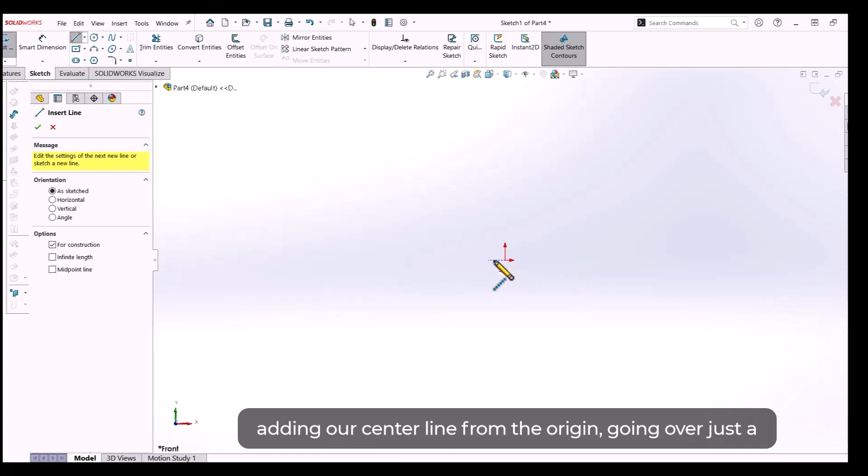Okay, we're going to start with a new part and sketch on the front plane, adding our center line from the origin, going over just a bit, and we are going to anchor that, make a fixed position right there. That's going to be for our revolve feature, which we're going to do after we create the profile of this sketch.

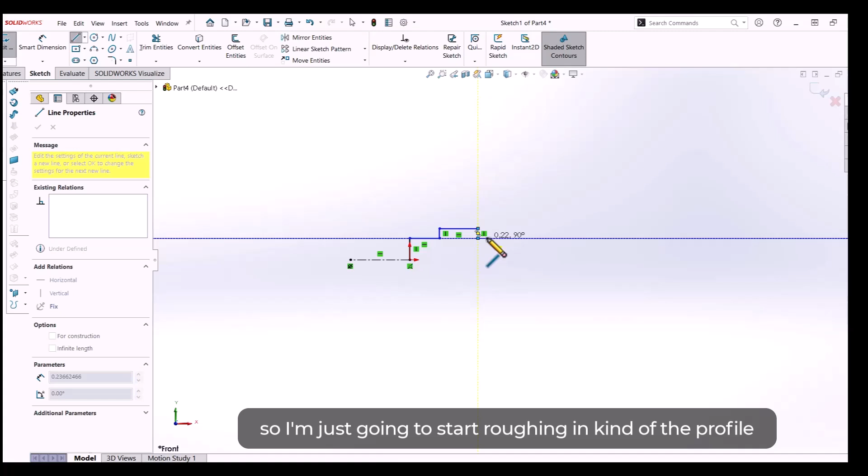So I'm just going to start roughing in kind of the profile that's shown in the book. You can see the preview and the numbers as I move the cursor, and so I'm getting it kind of close. I'm going to make sure that that's enclosed by turning on and off the shaded sketch.

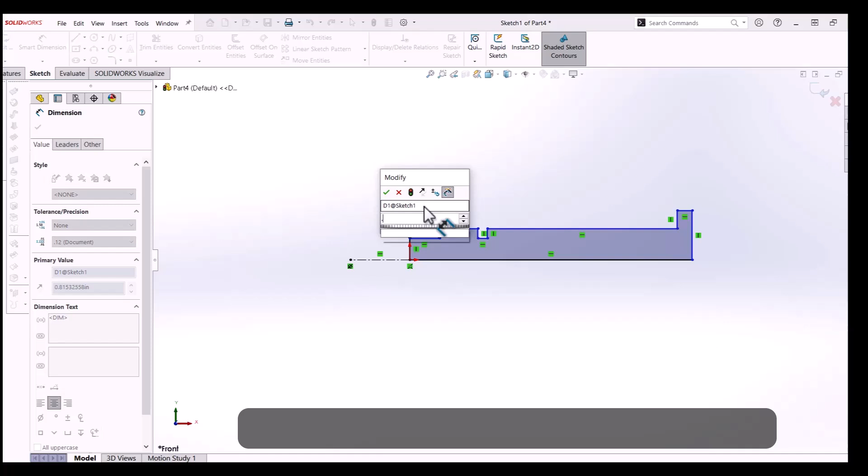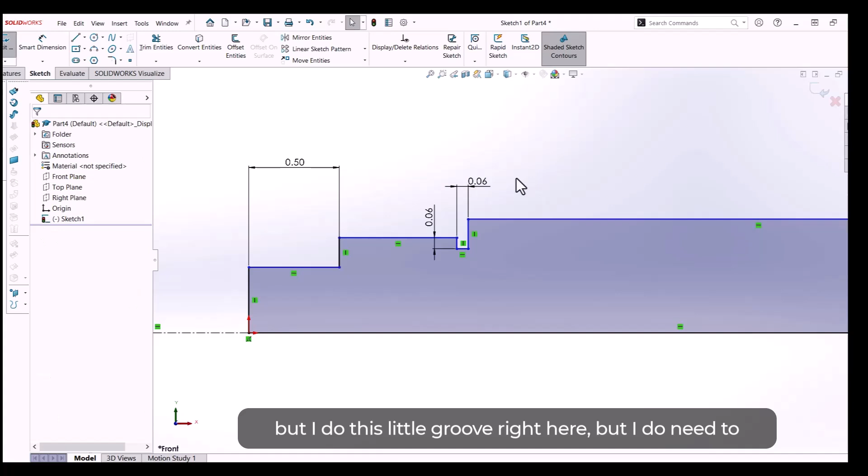Okay, just going to start dimensioning this out, just like in the book. Trying to find the best place to start. I guess on this part, there really isn't the best place to start, but I'm going to do this little groove right here, but I do need to make these two lines here collinear.

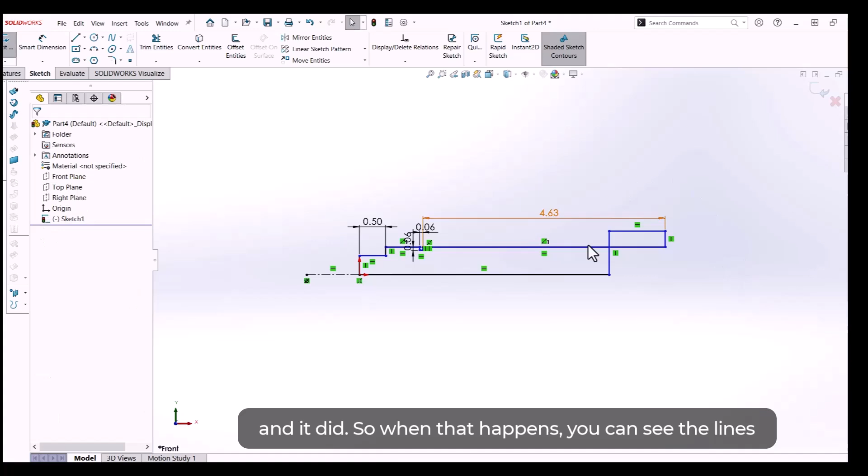Okay, I'm going to start adding some more dimensions, and this might screw up our profile when I type this in. And it did. So when that happens, you can see the lines crossed over, and I'm just going to drag that final little part off to the side to make that possible shape again.

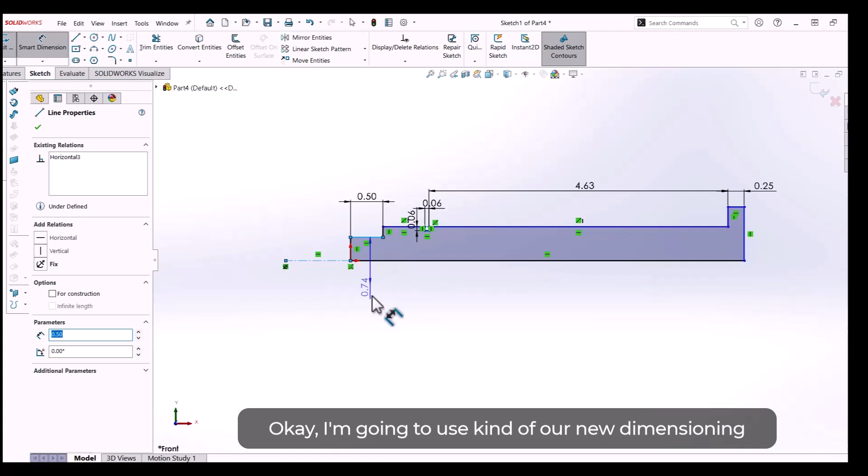Okay, I'm going to use kind of our new dimensioning technique to draw across the diameter of the entire future part after the revolve. You can see that to do that, I'm clicking on the center line first, then tapping the line, and then crossing back over the center line to give it that overall dimension.

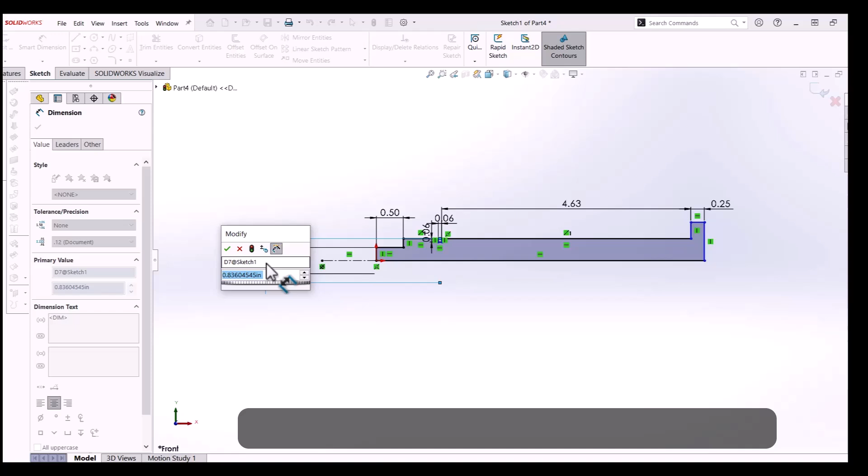I'm going to do it one more time on this right here. Crossing over, you can see how that's done. And I'm missing a dimension. What am I missing? Okay, I'm missing this one.

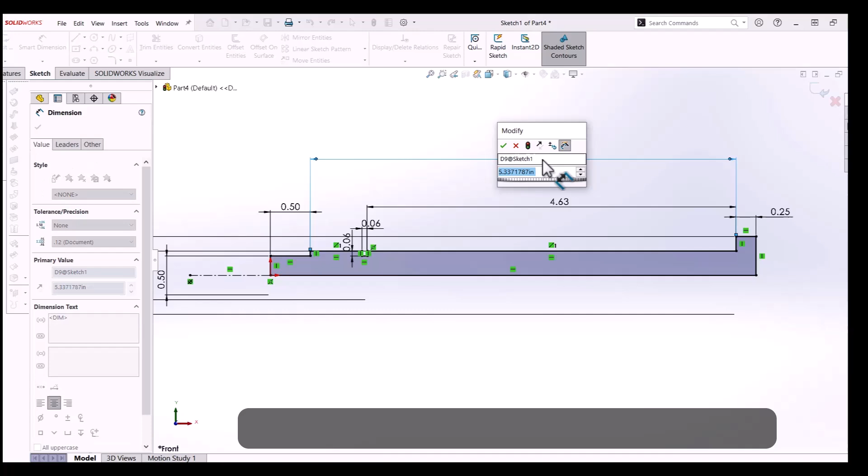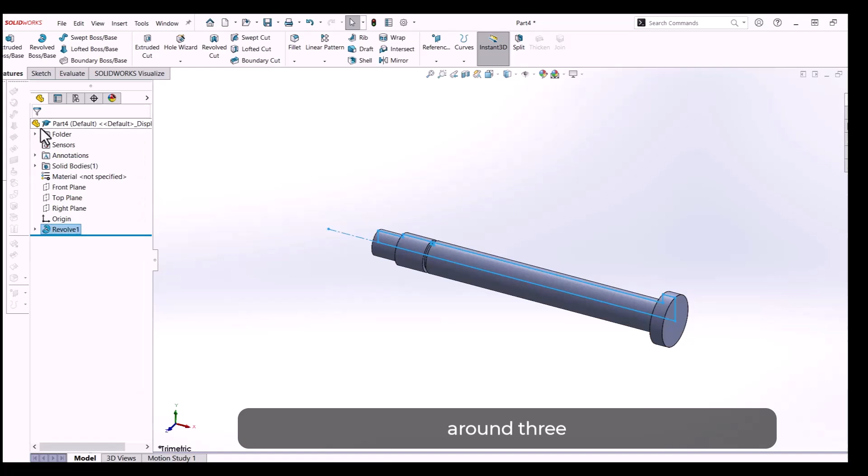We've done revolves before. I'm just going to keep the sketch in front of me. Revolve. I can just click on the line there, and it will use that as an axis to go 360 degrees around to create the solid part on the revolve.

Okay, I'm going to do this little groove here at the top after I save it. I've already saved it here, but this is just a reminder that you guys need to save these so you don't lose anything.

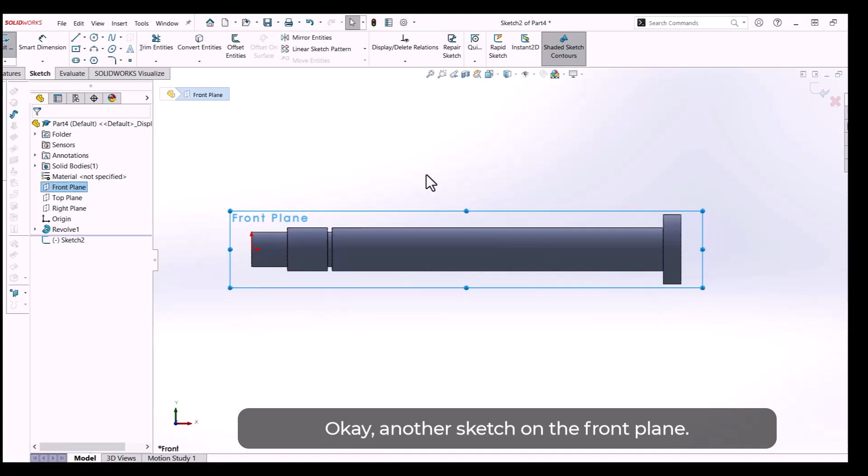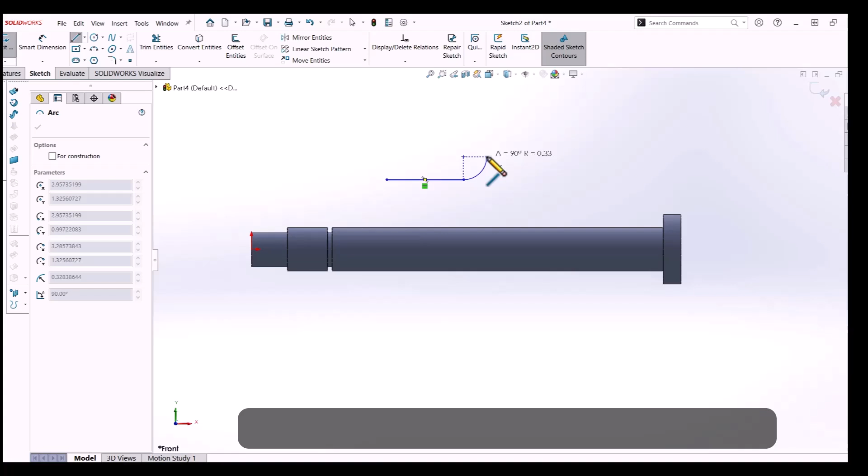Okay, another sketch on the front plane. We're going to use kind of this new arc technique, it's kind of a shortcut. You draw a line out just like we would do another line segment, but if you go back to that point, you can swing up and create an arc. You can go down, up. All right, that was just an example.

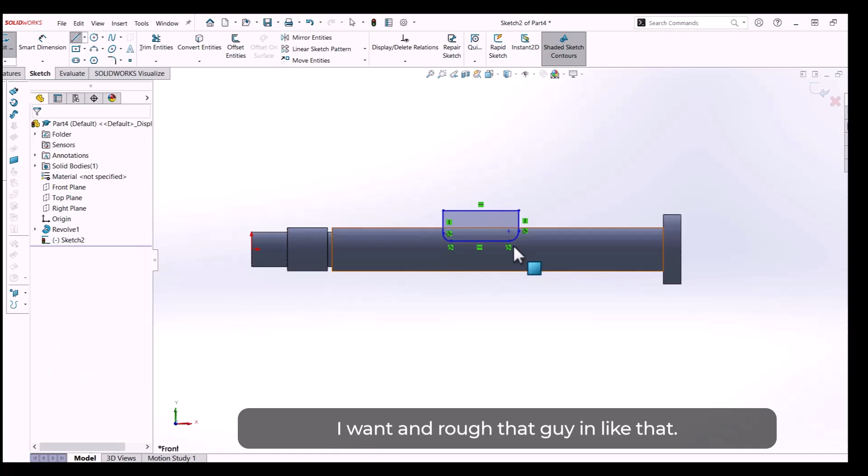We'll do this shape down here. I'm going to start with the vertical going down. I'm not touching the top of that shaft because I don't want to create a coincident. In this case, that's not what I want. Just going to rough that guy in like that. You can see there's tangencies, they're already created from that arc because those are tangent in the construction of them. I made those equal right there by holding Control.

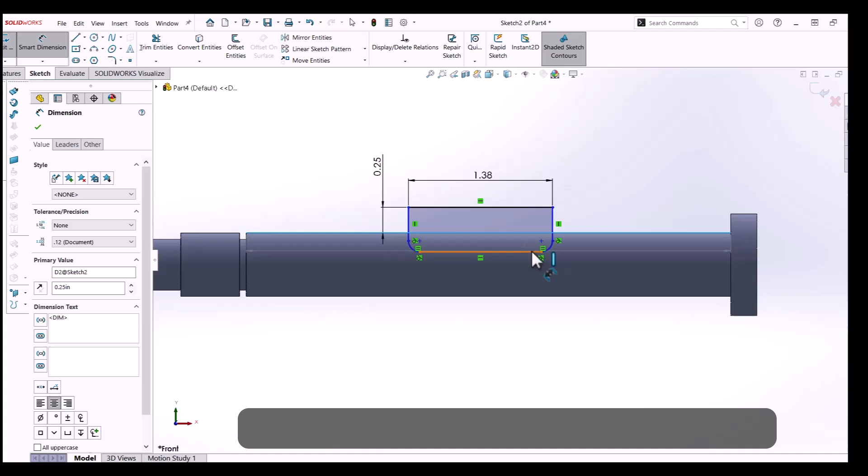I'm just going to start dimensioning this out. And I have those both equal, so that radii applies to both of those. So that will fully define that groove there.

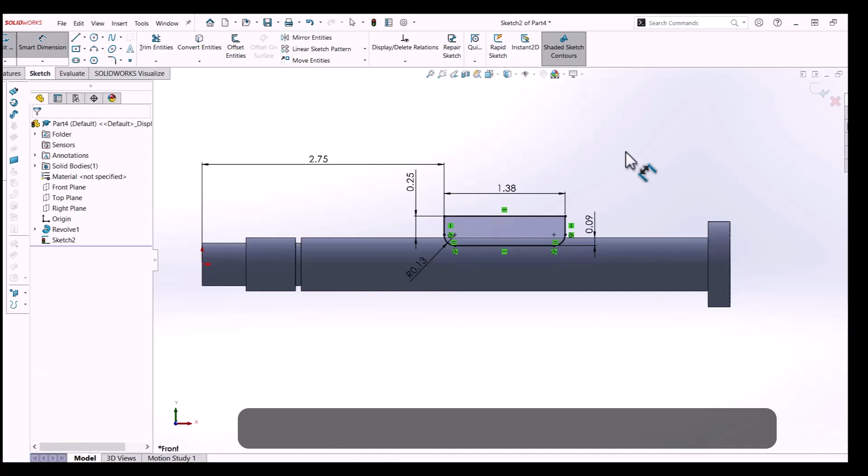And an extruded cut from the midplane. Type in our distance. Okay, that.

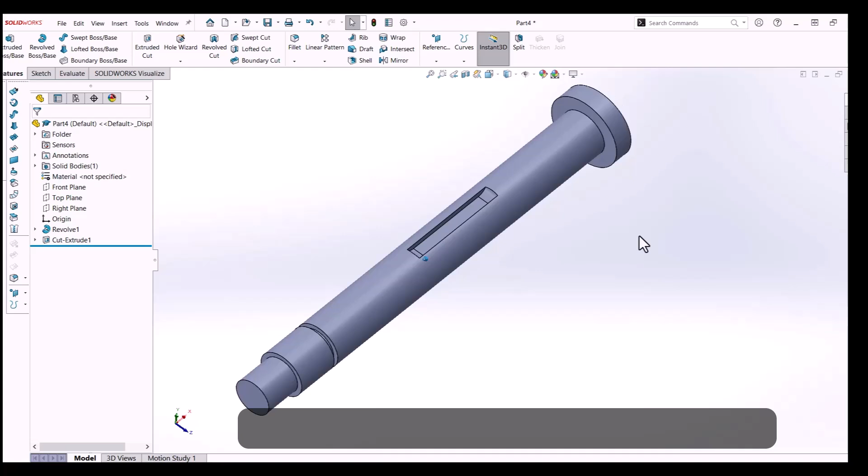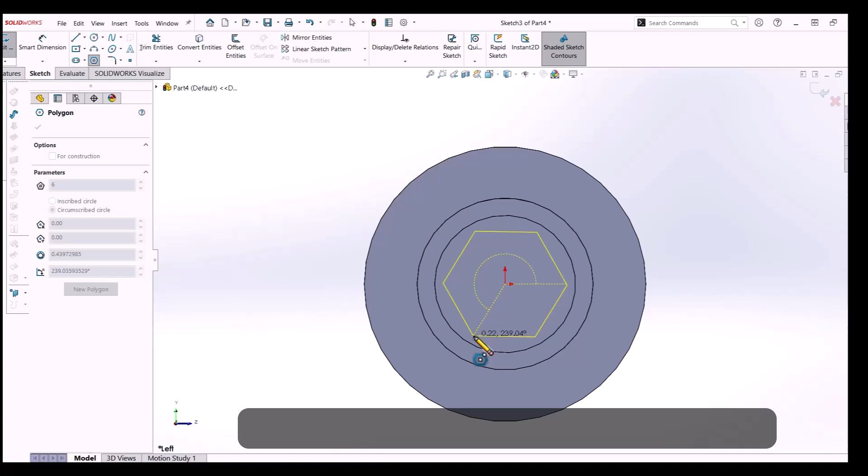Okay, we're going to do a sketch on this face here. Polygon, 6 sides, circumscribed. I'm not going to touch any of the points because I want to add the constraints myself to make sure that they go. I want that edge and that edge to be equal. And then I want this to be horizontal. Lock that into place.

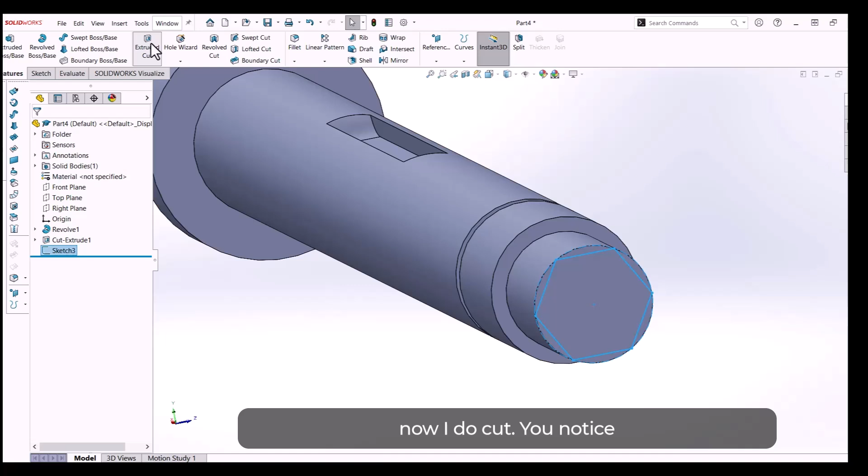Okay, now I'm going to do a cut. You notice right now it wants to, just by default, cut inside that profile, but we want to cut the opposite side. So we want to check that flip side to cut. And we're going to go up to this surface here. Looks good.

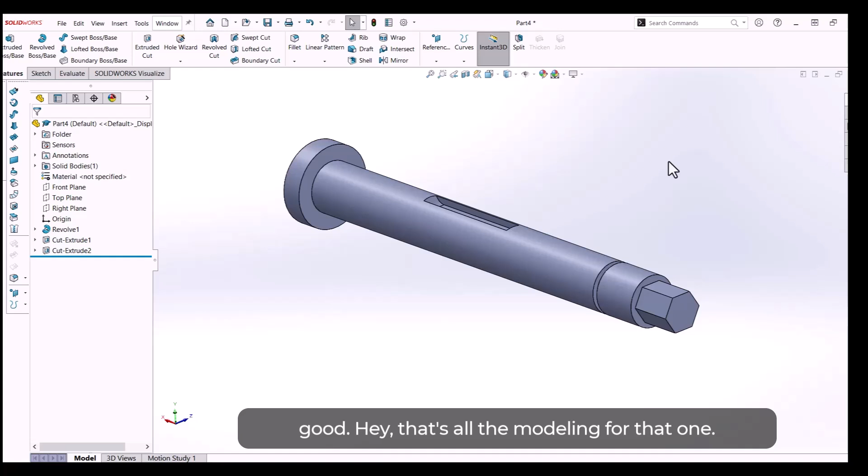Okay, that's all the modeling for that one. And change our material. And that's it.